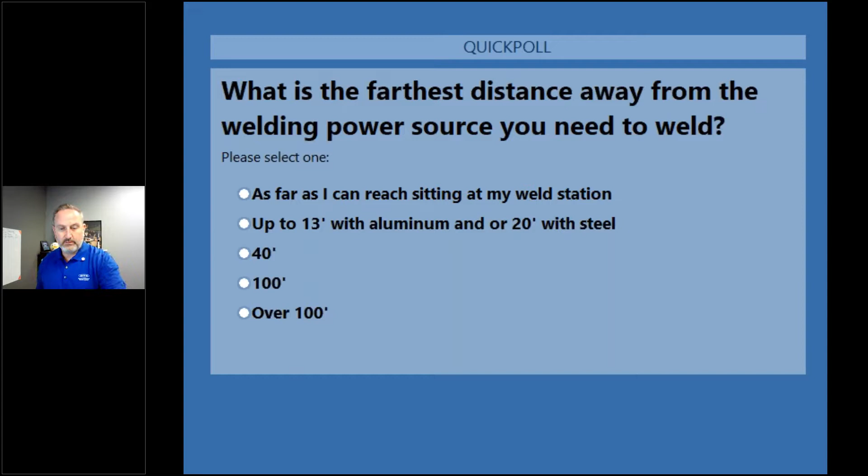And let's take a look at those poll results. And predominantly with 50%, people want to be able to weld 13 feet away from the power source with aluminum and 20 feet away with steel. And second place is a three-way tie. Some people want to really get out there over 100 feet. Some people want to go 40 feet, but some people just as far as they need to weld at their weld station. There'll be some items of value in today's webinar for those people that answered, I just need to be able to weld at my weld station, but this is predominantly for people that need to weld farther out.

So let's get into it and take a look at what we're going to try and cover today. So we're going to come back and review all these welding myths at the end of our presentation today. These are some of the leading opinions when it comes to large area fabrication gospel within the welding community. Hopefully you're already aware of some of these myths and are busting them in your normal day-to-day operations.

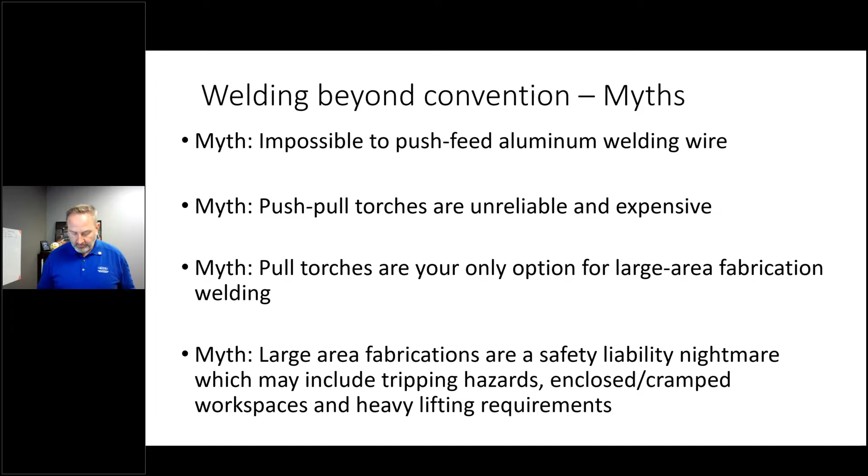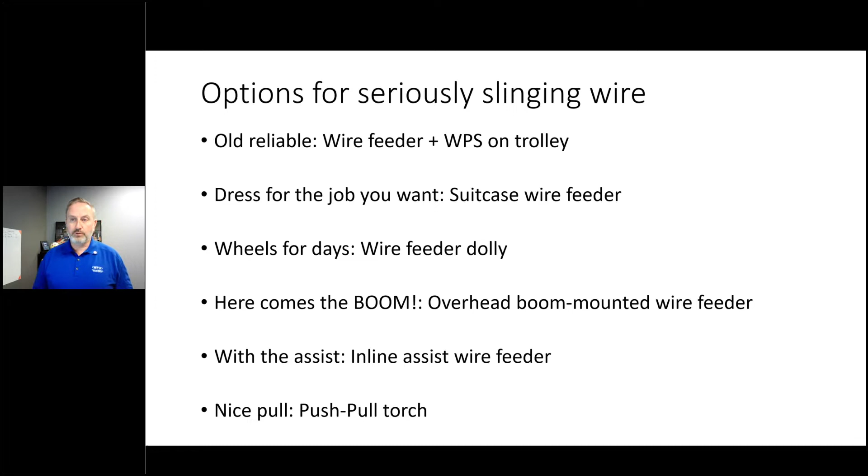So we'll start out and really dig into how to get wire out there and seriously sling it. From the basic stuff of just your wire feeder and weld power source, maybe just sitting on the floor, to getting it onto a trolley, maybe extending your range by taking your feeder out with you, doing some things to get the wire feeder up overhead, and all the way through to what we'll introduce today with what we've already got in the market and a push-pull torch, and the new reveal today is our inline assist wire feeder.

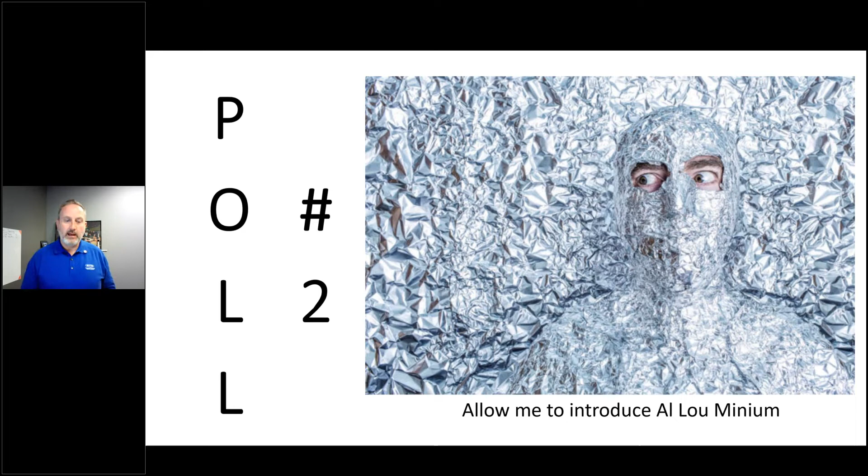Before we jump into all that though, we want to get to the equipment options and solutions that exist to help you break those welding gospel myths. And let's talk about public enemy number one. It's my buddy here, aluminum. Let's kick that conversation off with our second poll. What challenges do you face when welding aluminum parts?

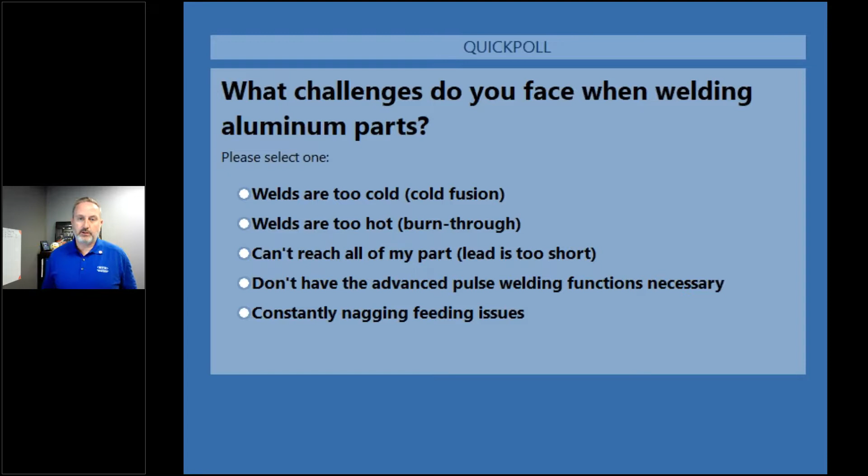And let's take a look at those results. Predominantly, welds get too hot with 54% here. And then another three-way tie for too cold, don't have the advanced pulse welding technology that you really need, or constantly nagging feed issues. And I think we're going to talk about a little bit of all of those.

But the reason I bring up aluminum, let's jump back into the presentation here, is that trying to feed aluminum wire is really like pushing rope, right? It's very difficult. So why not start with the hard stuff? And then if you can feed aluminum, yeah, you can probably feed everything else. Becomes just a whole lot easier.

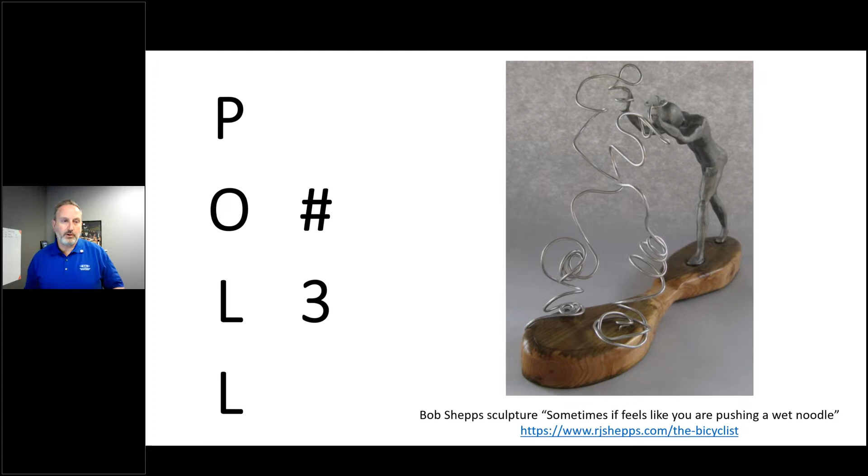So to talk a bit about your experience with feeding aluminum, let's see what your current situation is for those of you that are welding with aluminum in your current system by looking at poll number 3 here. How far from the source can you weld aluminum with your current system? Give everybody a second to respond to that.

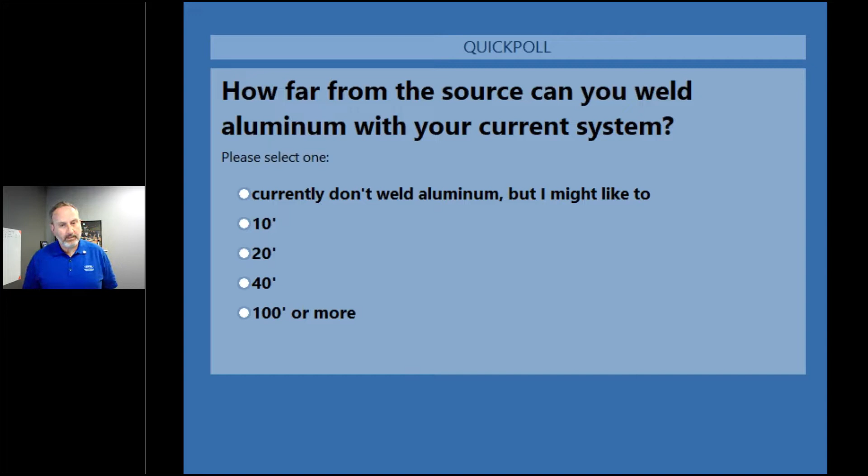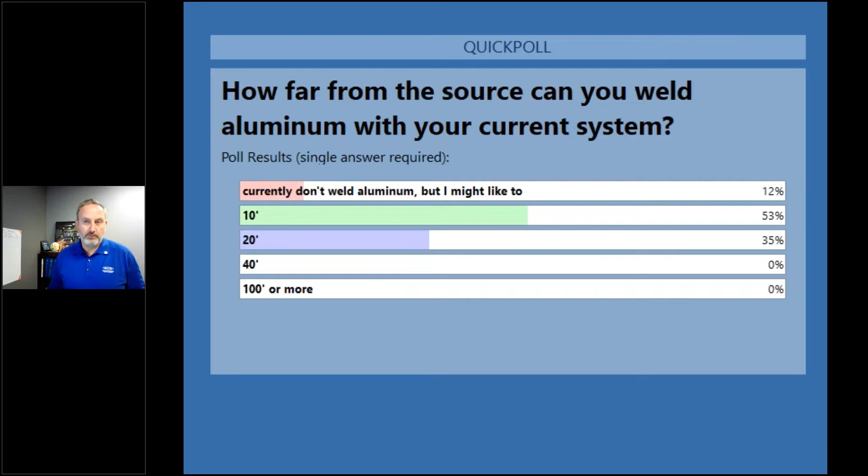And let's take a look at those results. So most people are able to get out to about 10 feet, which is pretty typical, right? Few folks on here can get out 20 feet. Few folks don't weld aluminum at all. Bear with me because I'm using aluminum as the example of getting feed reliability, but we're going to show you some solutions that can get you well beyond the conventional welding distances of 10 to 13 feet. And we'll talk about our products when we do that. I'm going to shut that off and we're going to dig into this.

Okay, so when feeding aluminum, welcome to school, right? Do a little bit of education here on feeding aluminum and really how to get aluminum pushed out 13 feet, how to combine with a push-pull system to get out to almost 40 feet, and then the ultimate, how to push-pull aluminum out 100 feet and beyond so you can push it an additional 13 feet.

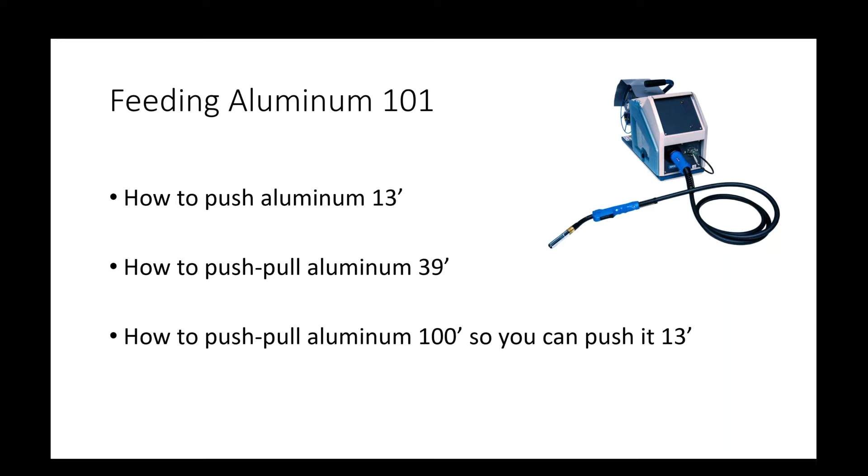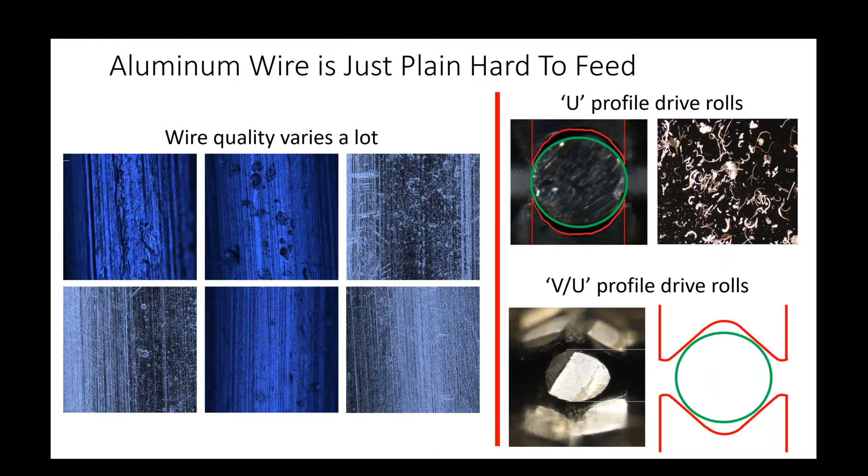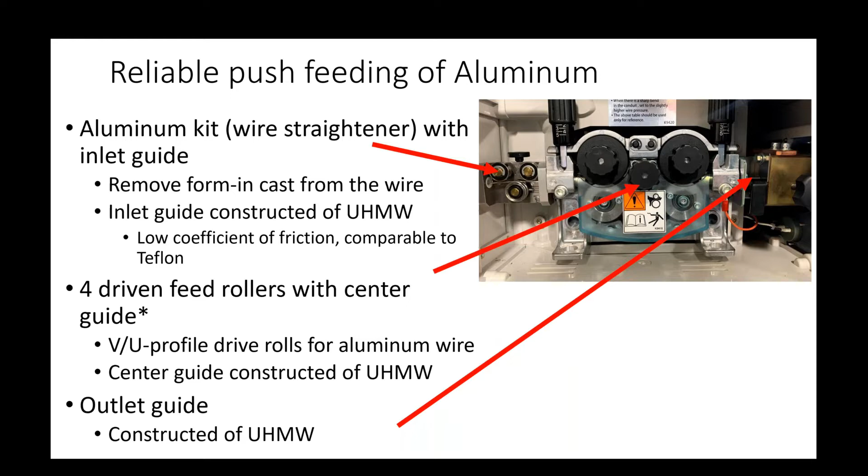Now, how to set feeding tension with an aluminum wire feed system. Here you can see the broader view: the wire feed, the inlet guide, the aluminum kit which is the wire straightener, the drive rolls including the center guide, and then the outlet guide over here to the Tweco torch, which you can see on the far right hand side.

When this video plays, you're not going to hear my voice, so let me talk a little about what Larry's doing here. He's set the tension of this wire such that when you restrict the wire out at the end of the torch, it slips. You want to have slippage. Slippage is good, that just means you're not going to bird nest inside the feeder. Let's take a look at that video of him setting up tension.

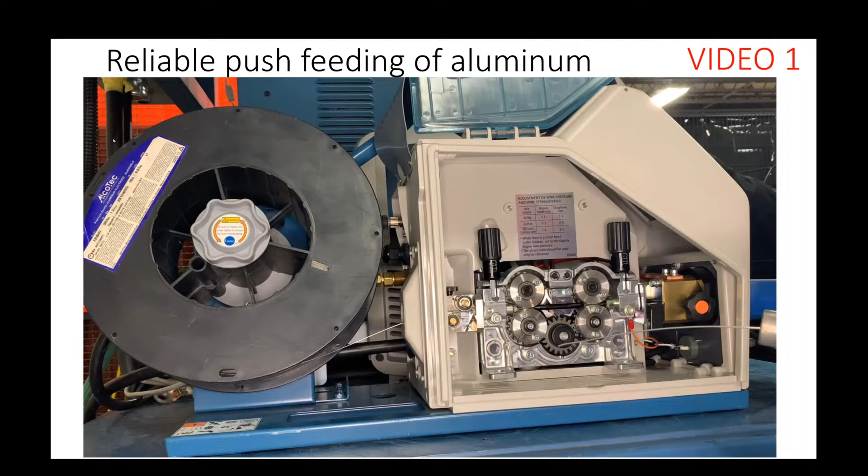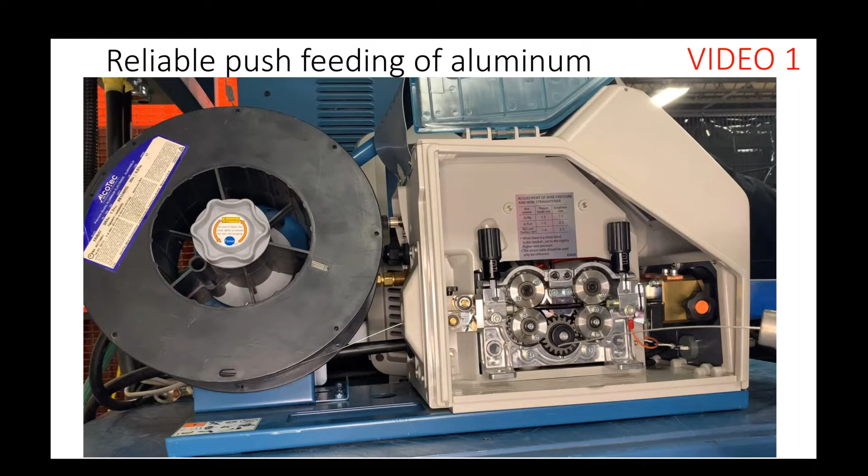All right, so you saw as Larry restricted the flow of the wire, it would slide through the mechanism. In other words, there was enough slippage there that you're not going to force in bird nest wire.

Now, this is an actual demo with customers here that are producing trailers. It's Extreme Trailer, one of our good customers. These are 13-foot torches, so we feel very confident in the ability to push aluminum wire out 13 feet. Let's take a look at these guys who use it on a daily basis and experience extreme reliability with the technology.

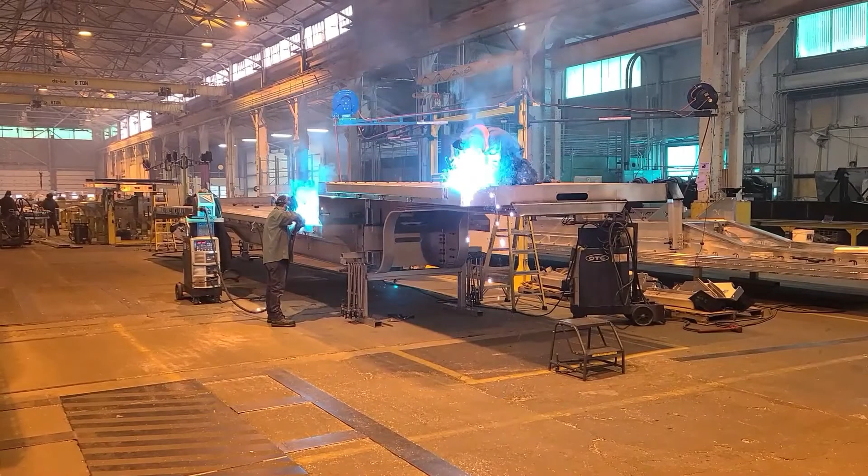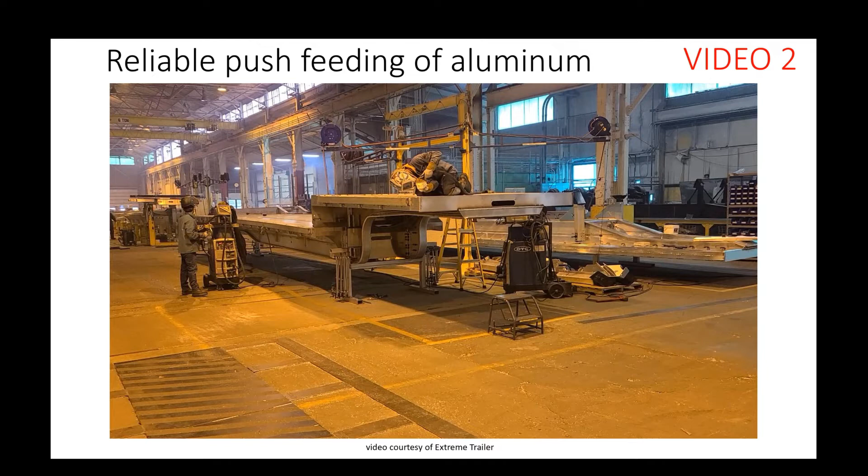13 feet is easily attainable with the DAIHEN reel feeding technology. But let's talk about some other ways to get farther out.

Another product we have is our XTEND-ARC family push-pull torch. This torch allows you to get 39 feet beyond the wire feeder. It comes in both an air-cooled and a water-cooled version.

It comes in pistol grip or standard grip, but it incorporates our IntelliTorch technology, which is the ability to remote control your weld process via the directional pad and built-in display in the handle of the torch. It's designed to be easy to use, even with your welding glove on, and it's very responsive. It also includes a built-in headlight, so if you're working in a restricted area without much light, this will help you see your work.

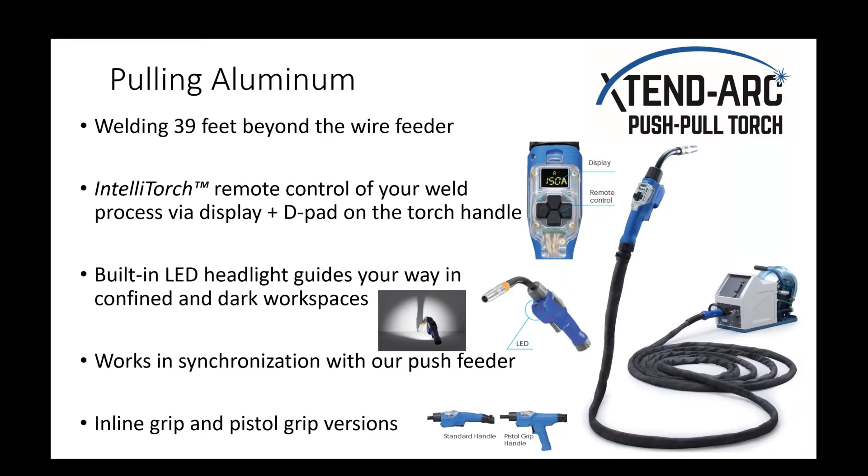This works in synchronization with our push feeder, so we need to be able to push aluminum out to it so that it can pull it the rest of the way.

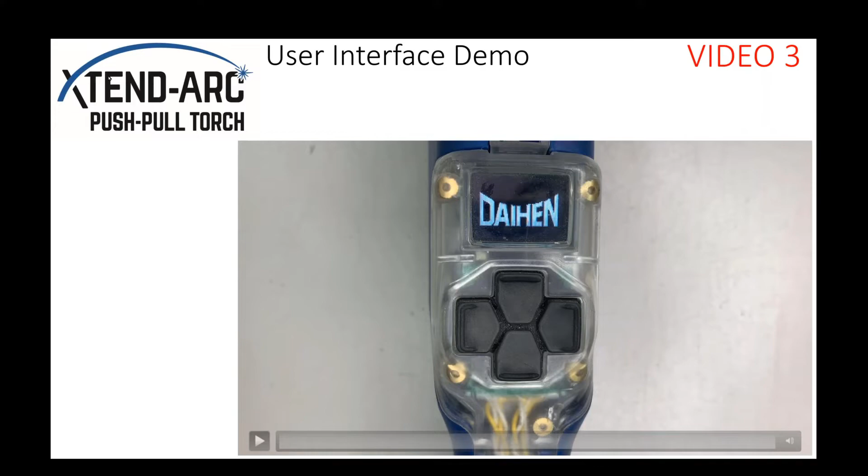Let's take a look at a demo walking through the user interface of this product. We're talking about the startup screen and programming screen of the DAIHEN push-pull torch. First comes up the DAIHEN logo along with the firmware version.

We have a D-pad below the screen that allows us to do navigation and settings on this. The primary settings come up. First is the welding current. This is the setting from the last power-off of the unit.

Using the right control, the next screen that comes up is the wire feed speed setting. Next to that is the welding voltage setting. And next to that is the synergic value of the arc length tuning. The last screen is the job or program number.

We go back to the welding current by using the up or down buttons. We can control the amperage from the handle. Next over would be the wire speed. We can go down or up in the wire speed.

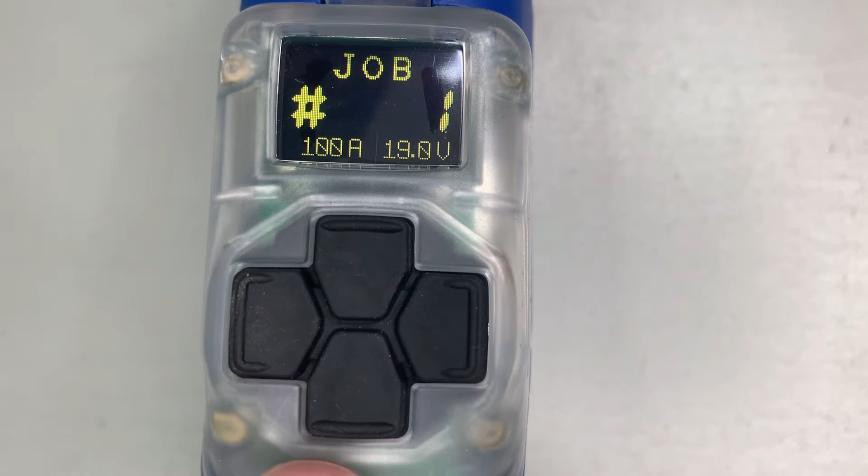Next one over would be the voltage. We can go up or down in the voltage. And lastly is the arc length tuning or synergic setting. Use the up and down buttons for that. Lastly is the job or program number. As we scroll through these numbers, we can see at the bottom of the screen where the amperage and voltage change, corresponding to the programs that we call out.

By holding the right-hand button down, we can load up another program. Getting into the secondary screen, we push and hold the left button until the screen changes. First option up is inching. We can switch to the right to inching and call out and look at the inching speed. This one is 250 inches a minute.

In the auto inching, we can push the right button again and it will feed the wire out. In this case, it's preset for 250 inches a minute. We can scroll up and down to change that speed. The job save allows us to go in and look at jobs that are there and change those programs to call up a new program or save the program that's there.

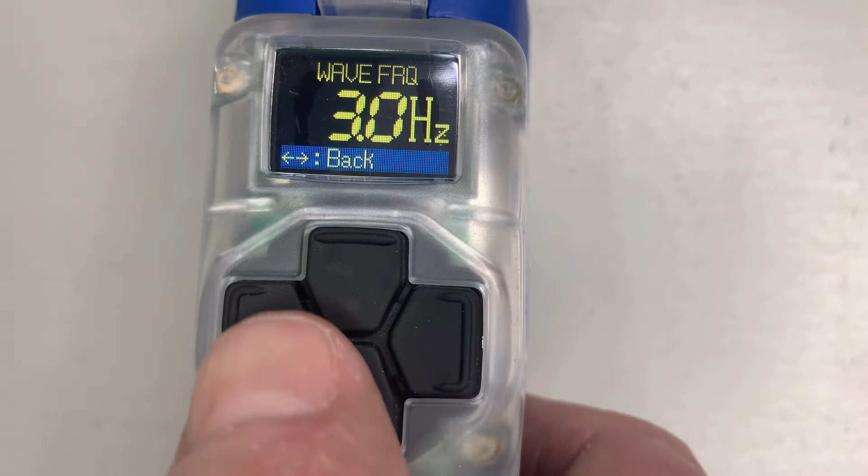The arc control allows us to make adjustments to the arc control, which is a fine-tuning of our arc. The wave frequency allows us to go in and adjust the frequency in our wave pulse programs, either in DC wave pulse or AC wave pulse. The EN ratio allows us to adjust the ratio between positive and negative on our AC MIG machines.

The version allows us to check the software version of this torch. The log allows us to check total welding time and max temperature. In this case, this is a brand new torch and we see no welding time, and we see that the ambient temperature here is 27 degrees.

The torch load is an indication of the power required to feed the wire. This is useful in examining the torch load differences and helps us know when to change liners and contact tips. The gas check allows us to feed gas or purge the gas from the torch handle without having to go back to the power source.

And then we're back to inching. To go back to the main screen, we push and hold the left button again, and we're back to the primary controls. Another nice feature with our push-pull torches is the headlight. It allows us to get into dark areas and be able to see where we're making the weld. The light comes on by pushing the left-hand button and holding it until the light comes on, and then we can turn it off the same way.

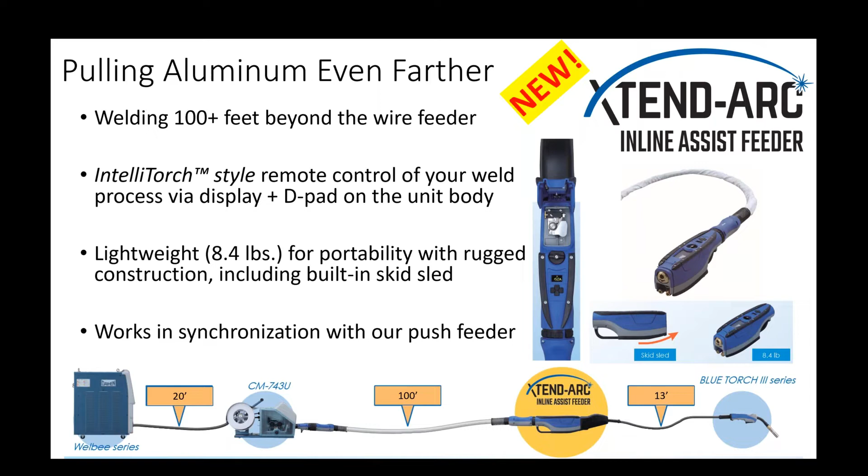Let's go through a demonstration now of the user interface and a better look at the unit from Larry, our welding engineer.

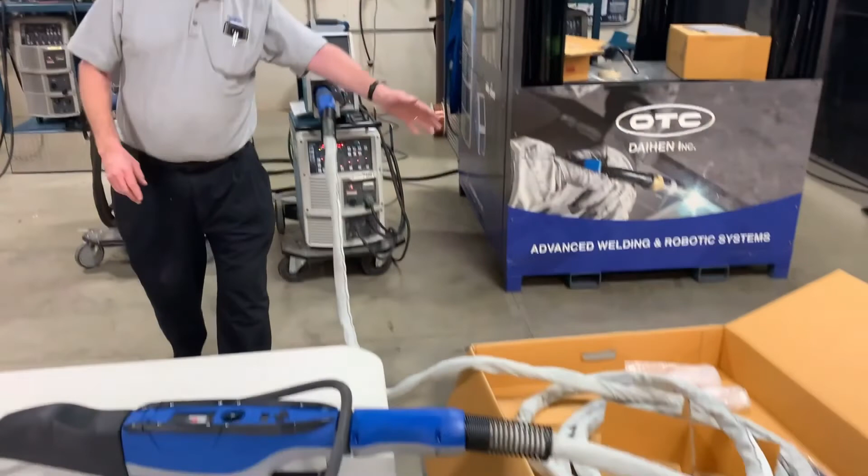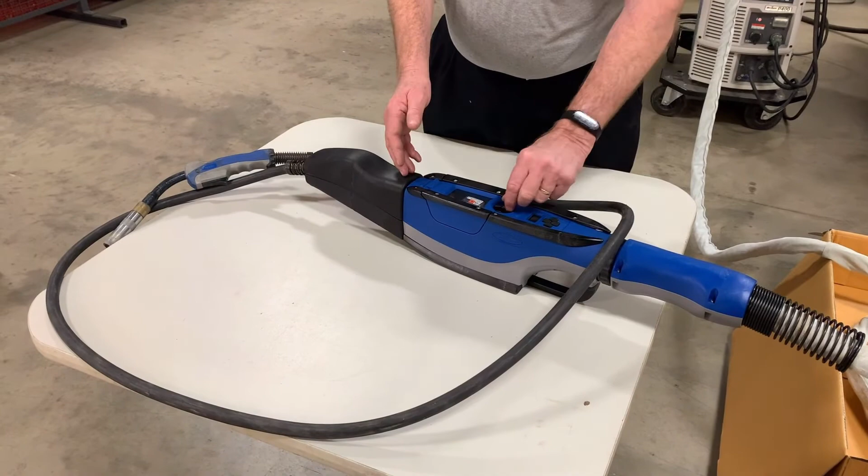We're showing our assist feeder here. It uses a standard Welbee power source, a standard wire feeder. We've got an adapter to the wire feeder to our umbilical. The umbilical cable can be 10, 20 meters or combinations of the two to extend out to the assist feeder. The assist feeder here allows us to take wire that's pushed out from the standard 4-roll feeder to here and support longer distances and more complex areas to get into.

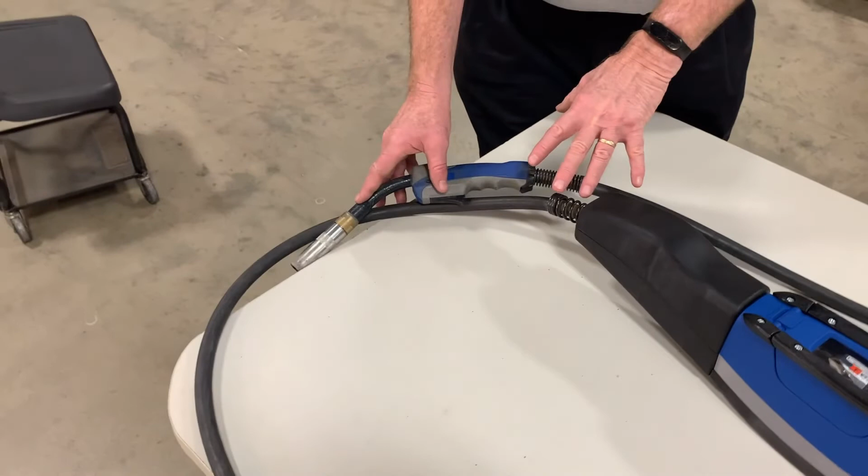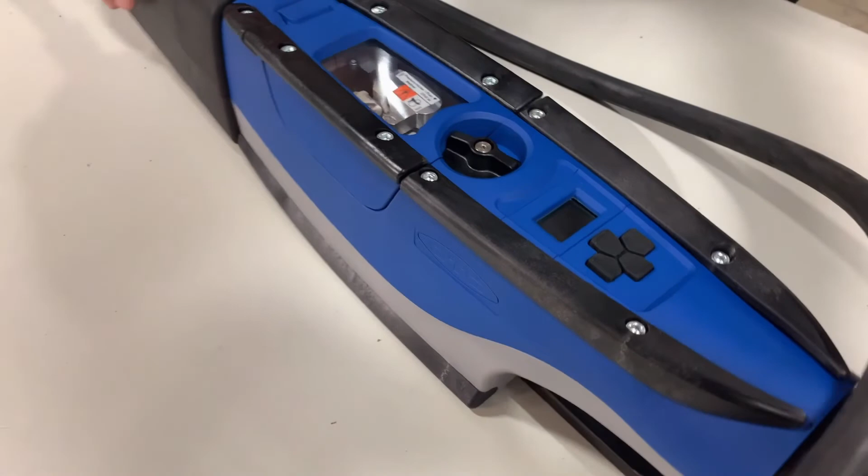The final component is a standard push type torch. No push-pull here, standard torch, standard consumables. The assist feeder has skids mounted on the top and the bottom, allowing us to move it around. It also has control features that allow us to make changes without having to go back out to where the power source is.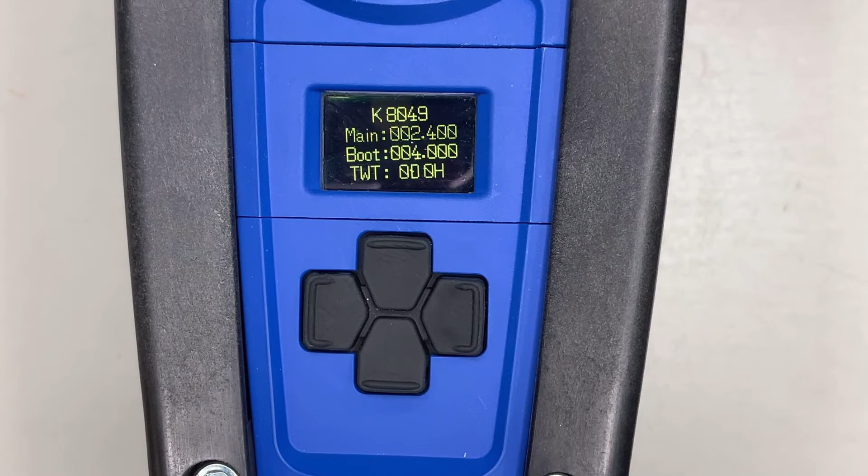This is a tour of the OTC XTEND-ARC Inline Assist Feeder user interface. On startup, the DAIHEN logo comes up, followed by the firmware version. The system is controlled with a D-pad, 4-way control, for the navigation and selection of program parameters. The welding current is initially called up from the last use or last program when the machine was shut down.

The next screen to the right is the wire feed speed. The next screen is the welding voltage. The next screen is the arc length tuning, which is the synergic value. And the last screen is the job or program number of saved programs in the welder.

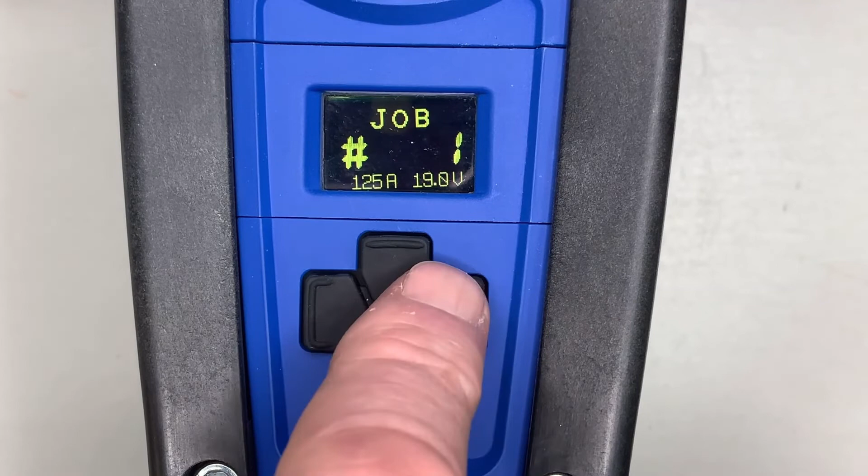We go back to the current, and using the up and down selectors on the 4-way, we can change the welding current from our remote location, either up or down. Switching over to the wire speed, we can do the same there. We can raise or lower the wire speed of our program.

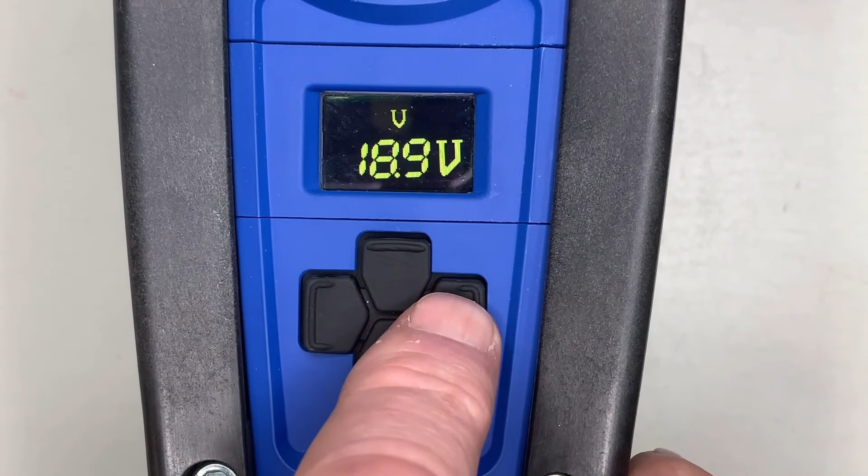We can also go to the voltage, lowering or raising the voltage to tune in our arc. Next is the arc tune selection of the value, the synergic value. We can raise and lower that value.

We decide we want to go back to and select a job, the saved jobs. We can select any of the preset values. You hold the right button and it shows that value loading, and we're back to, in this case, program 3.

From the prime menu, we can hold the left-hand button down and get into the sub-menu for secondary settings on the assist feeder. The first option that comes up is inching. If we right-click over, it shows the inching speed, which we can adjust with up and down changes. Then as we hold the right-hand button, we can actually inch the wire.

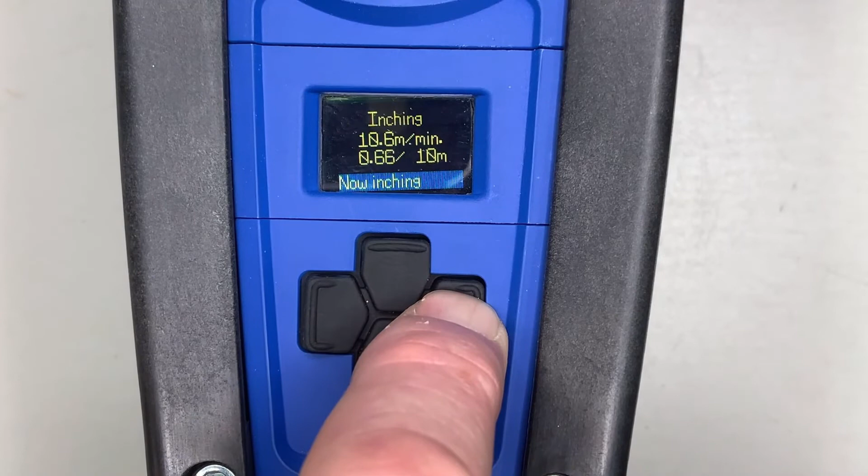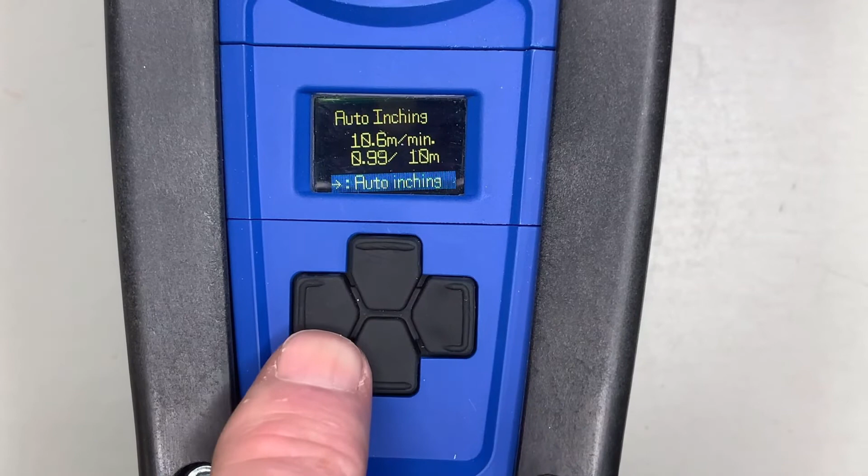Going back, the auto inching function, if we hold that, allows us to feed wire all the way from the primary feeder out to the assist feeder into the torch. This allows us to start this without having to continually hold the button until the wire is fed the entire distance.

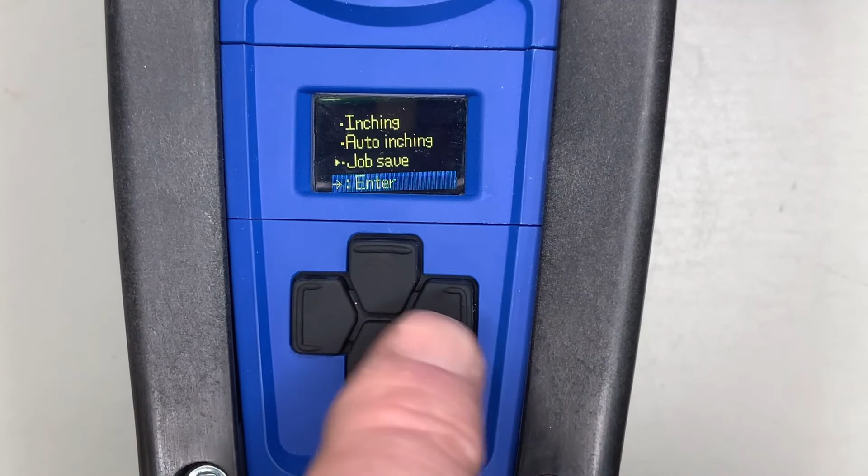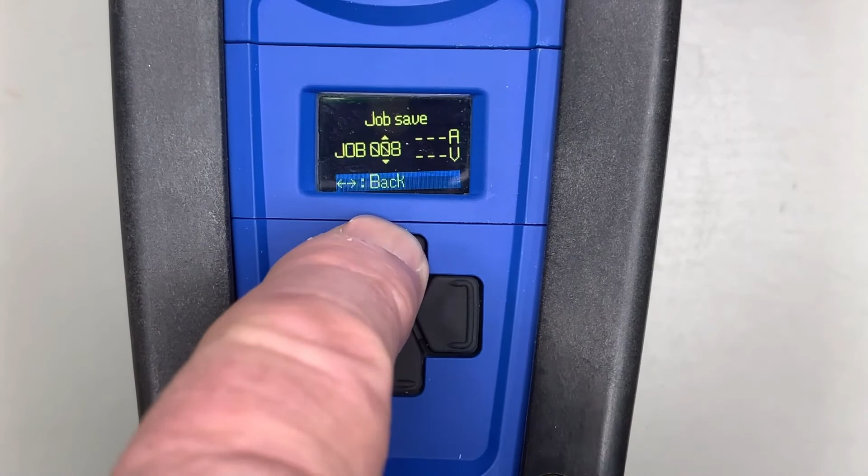The job save allows me to go in and modify a program, or look for a program that is not saved and save my existing program or my changes to a new program by holding the right button until the save screen shows.

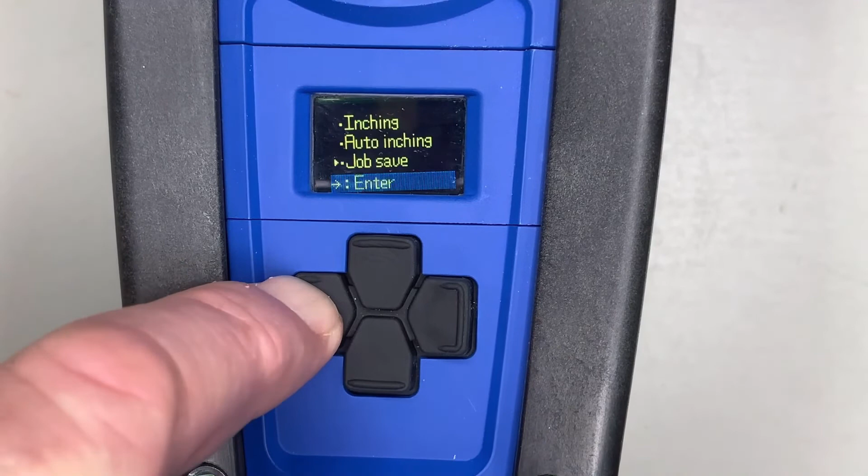Next one is arc control. Allows me to fine-tune the arc from the assist feeder.

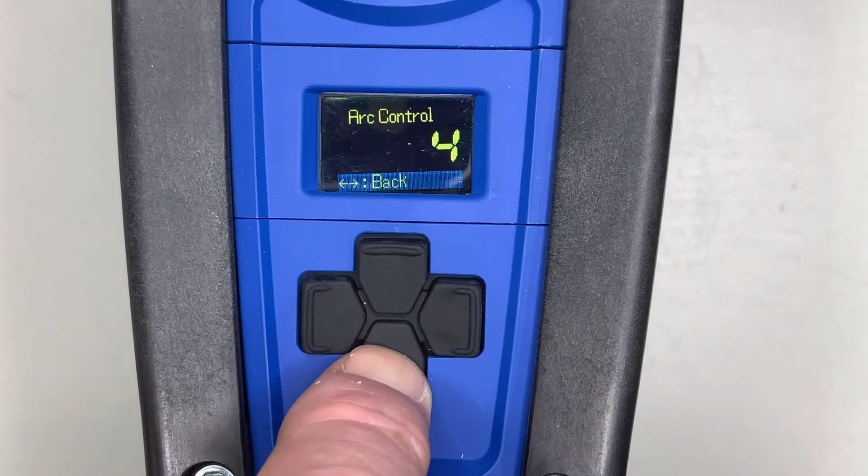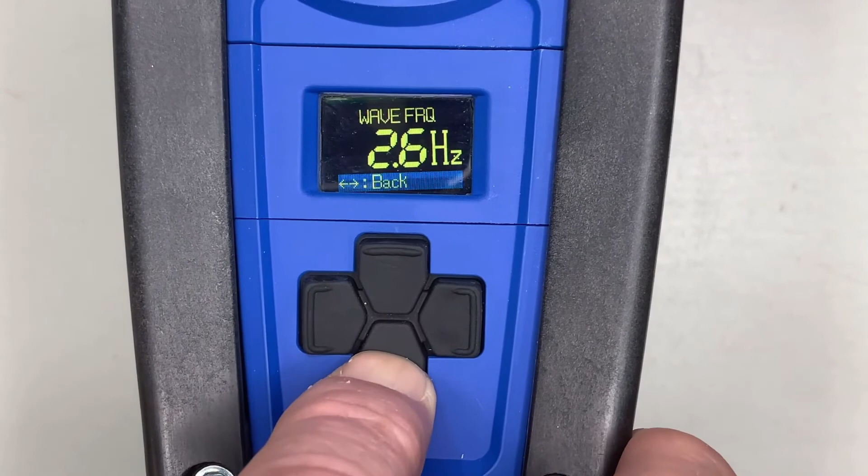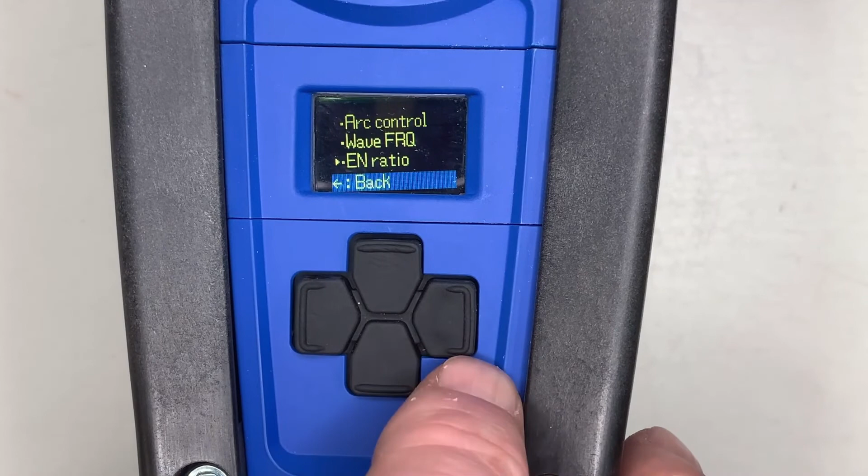Wave frequency. If we are in a pulsed program, a wave pulse program, we can adjust the wave frequency, the hertz, from the control here. If we are using the W400, which is an AC MIG machine, we can adjust the EN ratio from this point here. In this case, we don't have a W400 hooked up, so the program will not accept the changes.

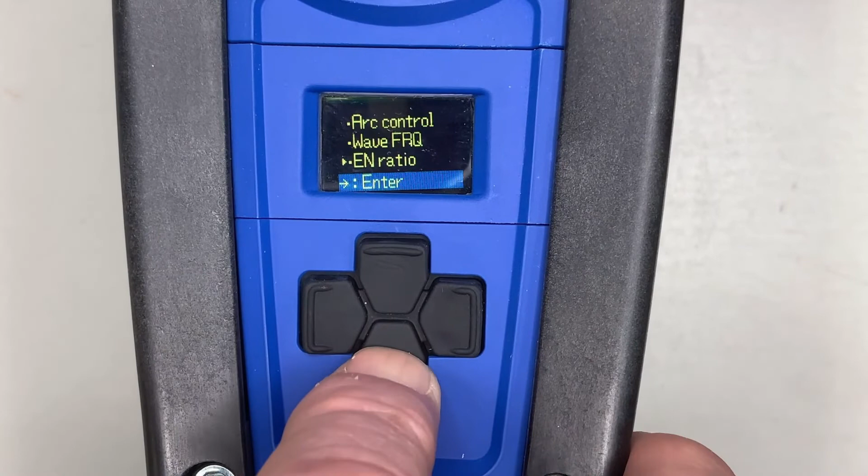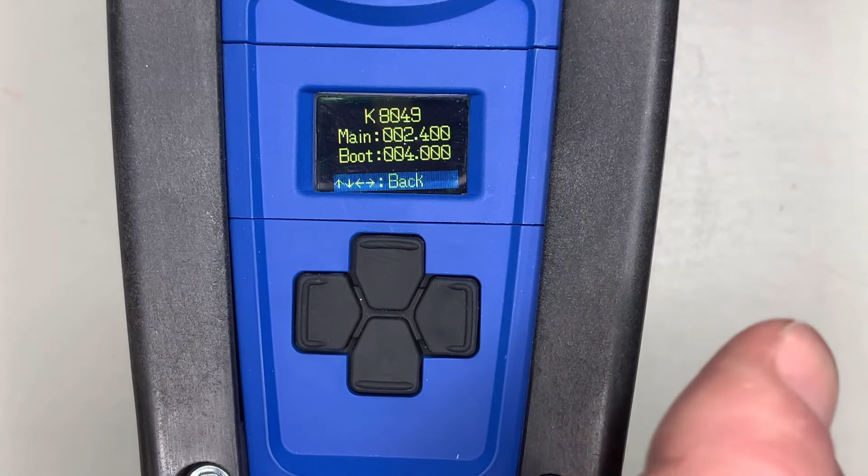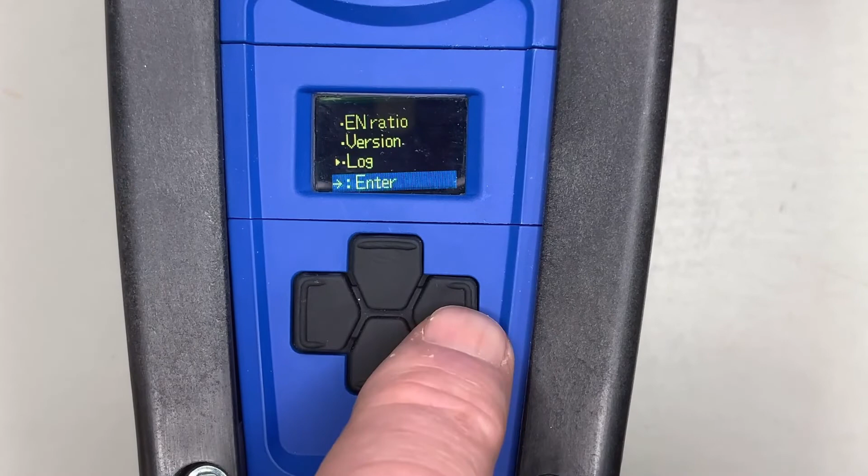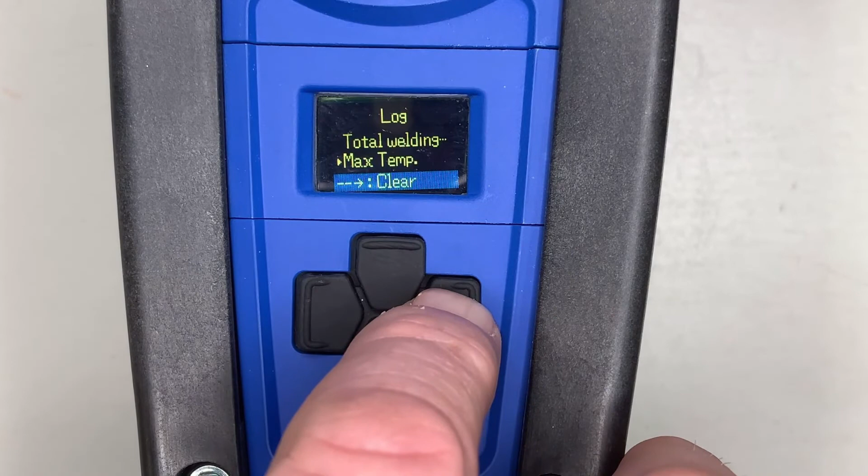The version, very helpful when calling in for service and looking for help. It helps us understand what version of software and firmware is in this unit to help us understand and make any suggestions and changes. The log screen tracks two things. First is total welding time, and second is max temperature. And then there is a clear screen that you can hit on the right that will clear that and will get you back to reset values.

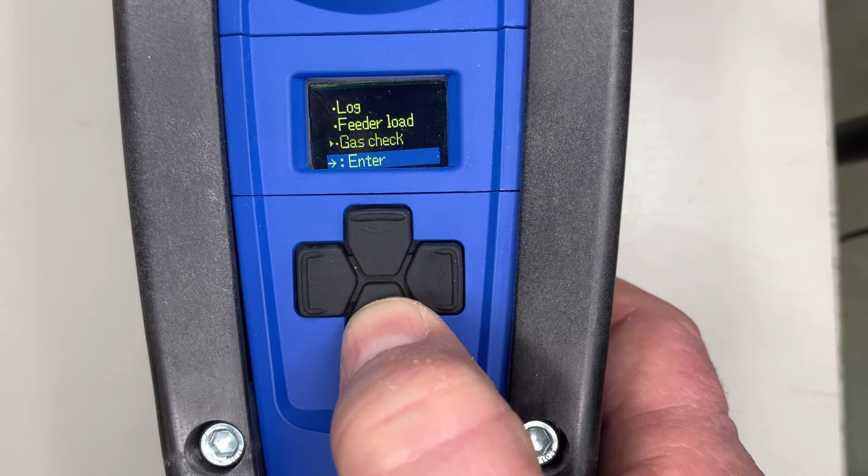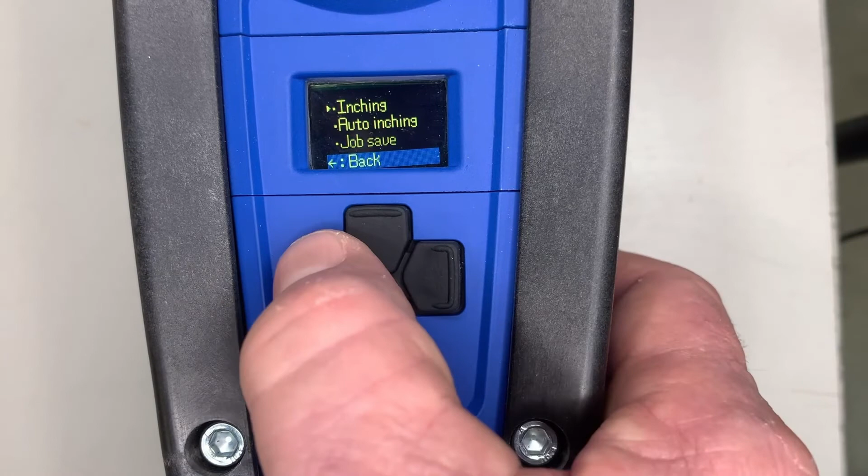The feeder load, which shows the amperage draw on the feeders and helps us to change out the liners when needed. Gas check settings, which allows us to purge gas from this screen. Cable length, which is initial setup. The model of the assist feeder. And back to the inching screen. Holding the left-hand button again takes us back to our primary setting screens. Another feature on the left-hand button is it gets you back.

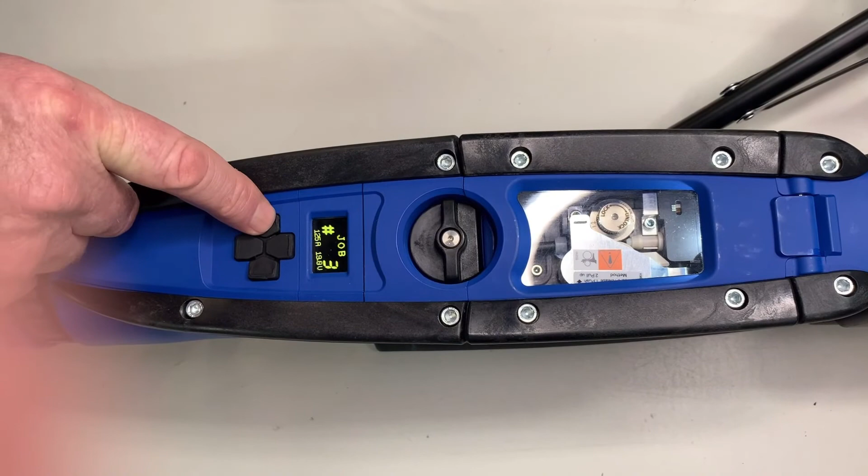It allows us to turn a light on if we're down in a dark area like the bowels of a ship. We can see what's going on with our feeder. We're able to get in there and see what's going on and make adjustments and check our feedability and our feeding system. Push that again and it shuts off.

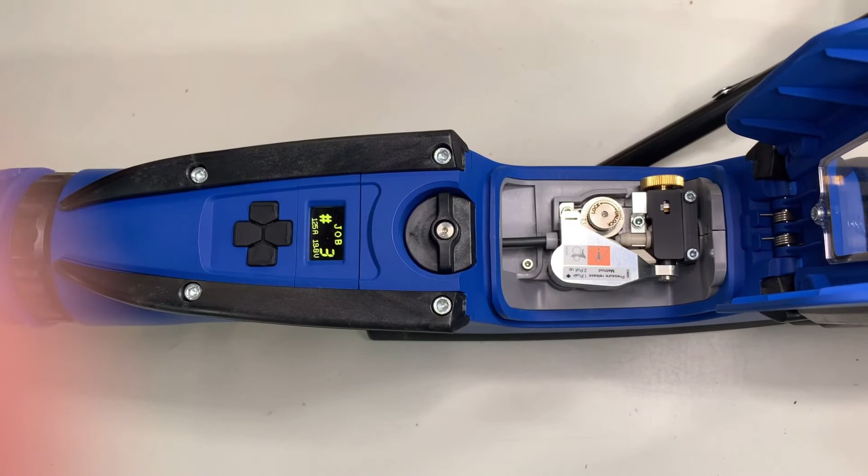A couple of things in that video I wanted to point out. I think you saw on the push-pull torch that the settings were in English units. And then with the inline assist feeder, don't know if you recognize it or not, but they were in metric units. So you can switch back and forth if your operation is set on one or the other. Of course, in the US here, mostly English units.

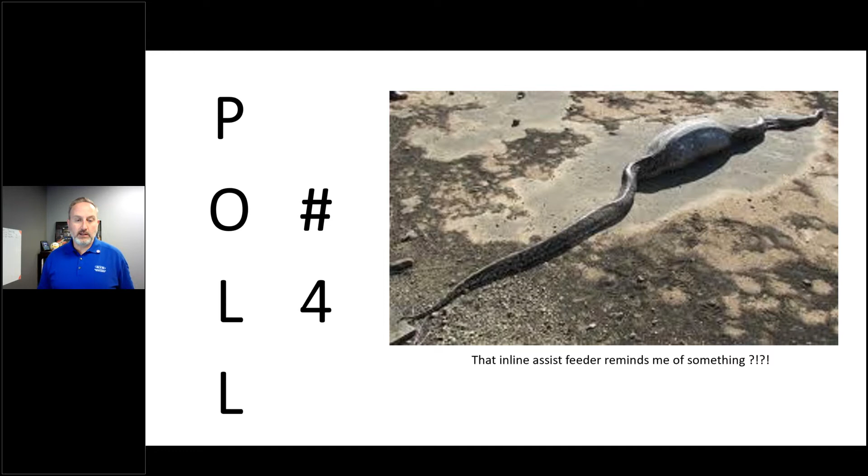So with that, let's get into our fourth poll. So what features of the new inline assist feeder caught your interest? Give everybody a chance to respond. Let's take a look at those results.

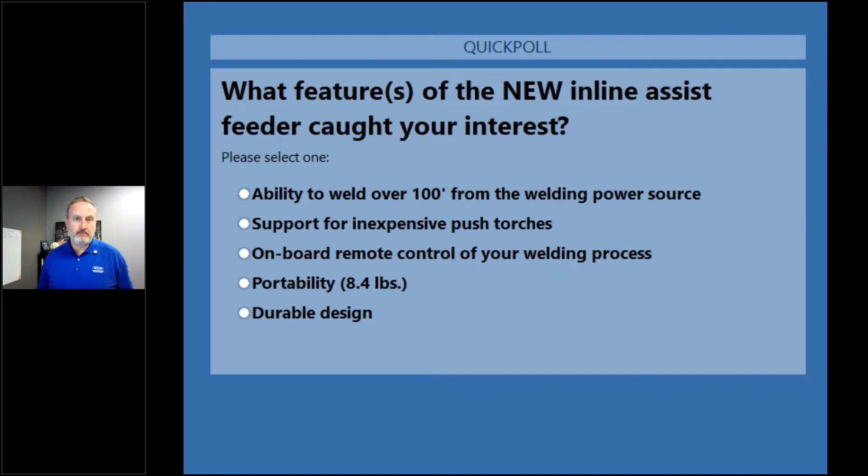So yeah, it is the best feature of this thing, and that is the ability to get very far away from your welding power source. This thing is extremely portable, very easy to use. I also like the fact that it uses conventional push torches. That's a very cost-effective solution when you think about replacing a push-pull torch and the cost of that compared to a conventional push torch, very inexpensive to replace.

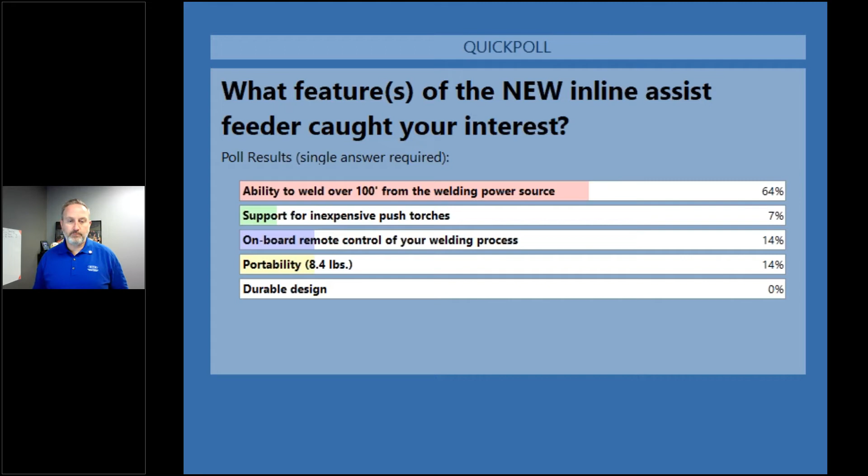A few other things here, people like the ability to control it locally. I think you have to have that, right? You're not going to walk 120, 130 feet back to the welding power source to make changes. You need to be able to do that on board the unit, and it is extremely durable. So it's a very good product. Excited about what it opens up for you guys. Let's move forward here.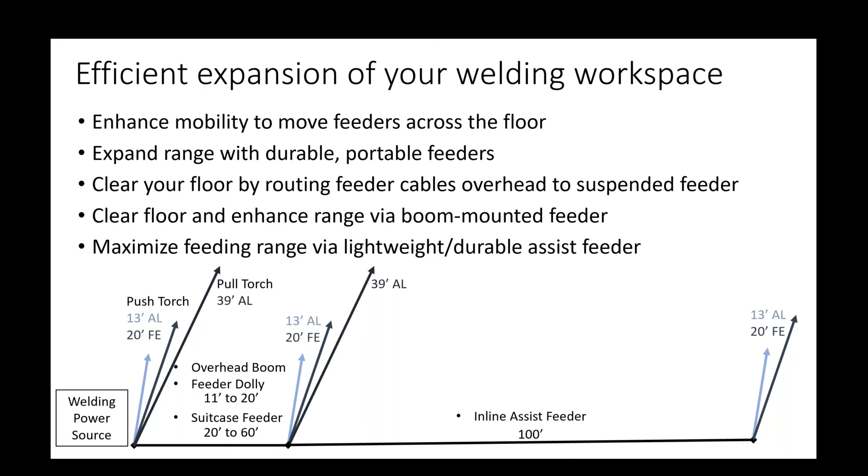And then that inline assist feeder, look at how far beyond even our other options here of a boom mounted feeder or suitcase feeder. Look at how far that gets you beyond that normal welding range. It's a game changer. We showed a video of one of our good customers, but this is something that you can really do on your own. And so how about a few things that are DIY, right?

So this is our welding trolley, but think about the mobility that a trolley delivers when you need to weld beyond your torch lead length. For a relatively small investment, and our fancy one that you see on the left is $625. The more basic one that our customer Extreme Trailer is using there is a little under $600. Or even just putting casters on the bottom of the power source in our set is about $175. You get mobility, and if you've got mobility, you can do quite a bit more with your welding operation.

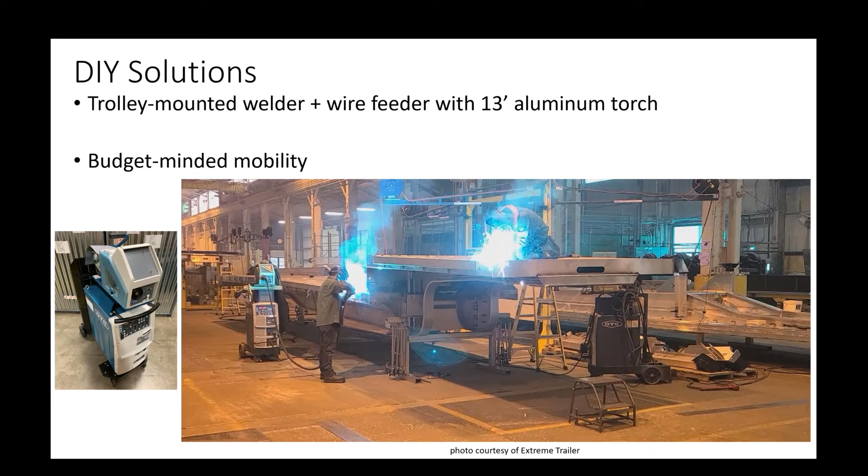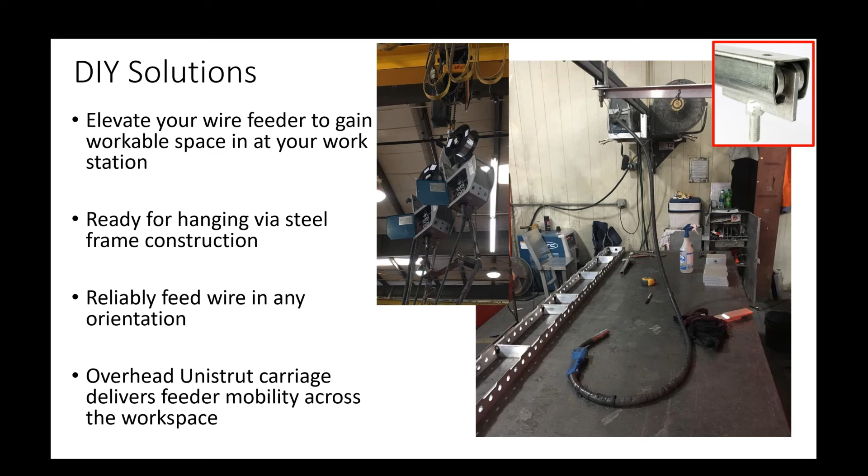Another thing that you can do yourself, hanging your wire feeder overhead to gain workable space. So hang it on an inexpensive winch, which you can raise and lower to access when you need to either put new wire in there or make adjustments. Or how about the customer here on the far right-hand side, who combined a unistrut rail with a sliding carriage, delivering much more mobility to their wire feeder. Again, these are ways you can clear your workspace and take advantage of expanded range of motion of your wire feeder.

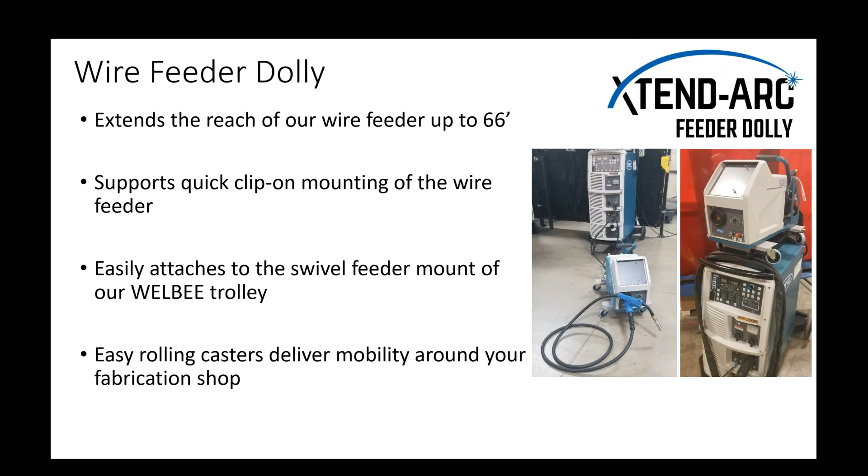In our XTEND-ARC family, we have another option, which is a wire feeder dolly. So this extends the reach of our wire feeder up to 66 feet. It supports clip-on, so it easily attaches and allows it to be pulled around on the floor via its 4 caster wheels. I mean, this could probably be done by yourself as well. We only charge a little over $200 for ours, and it comes with some added benefit of being able to combine it with our other products. You can see our dolly mounted onto the trolley, so it goes onto the swivel feeder mount and just allows you to use it either on or off the weld power source trolley.

Some more of our XTEND-ARC product, we have suitcase wire feeders. These are very portable and very durable. We don't make the case, so it's a commercially produced and commercially grade enclosure with the clamshell lid for easy access to the mechanism and the wire reels. Our 8-inch version is a little over $2,500, and our 12-inch version is a little over $2,600. And this eliminates the need for the conventional wire feeder. It replaces it with this unit. You will need to add extension cables from your welder to this feeder to make it work, but it's a pretty reasonable alternative. And let's look into the justification case for this.

Back to that trailer customer who, by adding the suitcase feeder, was actually able to gain 15% more arc-on time. That's an additional 1.2 hours of every welding production workday. Through that additional production, they are able to gain $190 a day in sales profit. You're going to make more money from the product that you're delivering out the door. So their suitcase feeder upgrade, in this case the 12-inch version, paid for itself in 3 work weeks. That's a tremendous justification.

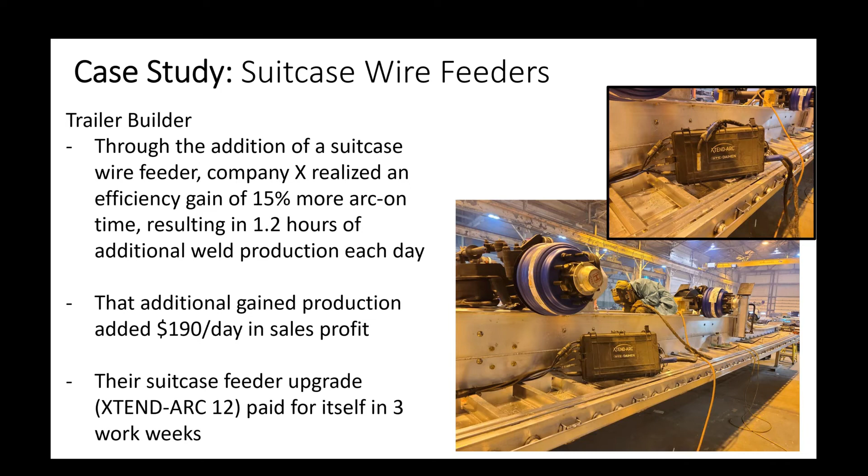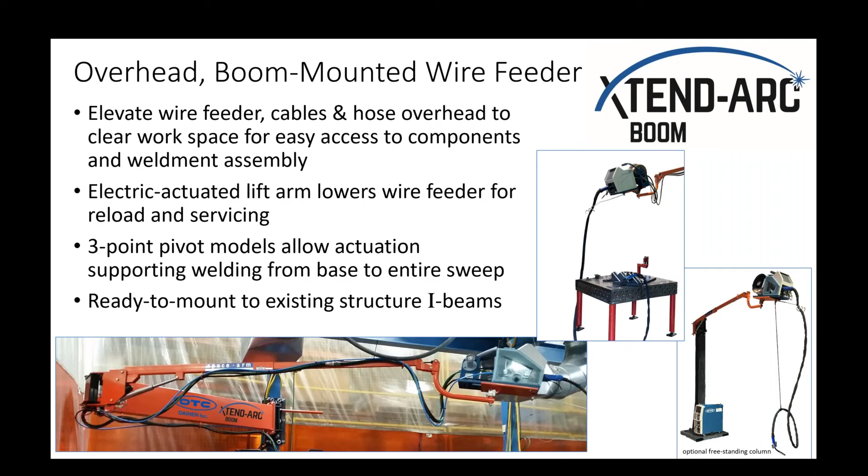We also have overhead booms in the XTEND-ARC family. These are an overhead boom mounted wire feeder to get the cable, hoses, and feeder up off the floor. We have an electric actuated lift arm, so you can lower the wire feeder to add a wire reel or change the wire reel, and to also service or set up the feeder. We have both single arm and dual arm. The dual arm gives you the advantage of 3 points of articulation, allowing it to sweep completely through your work area. Now we have 3 models of those.

The SPED 306, which is only the lifting arm piece, gives you 10 feet of sweep at an 8-foot installation height, and that goes for $1,600. The 606 expands that by adding the swivel arm to the lifting arm, giving you 20 feet of sweep at that same 8 feet of installation height, and that goes for a little over $2,000. And then the larger one, which increases that installation height up to 10.5 feet, is still giving you the 20 feet of sweep, is $2,400. So these are very cost-effective solutions. And I encourage you to take a look at the literature for this product, which is attached in the handouts of this presentation.

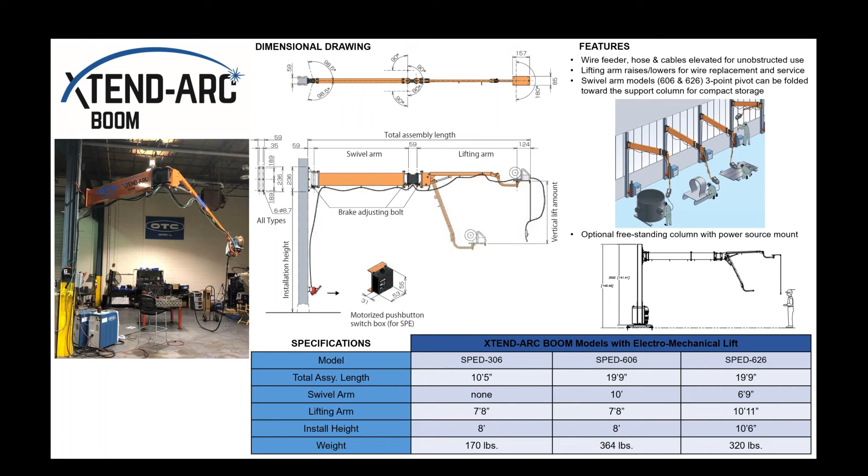Now the two we've already talked about today are the XTEND-ARC push-pull torch and our brand new XTEND-ARC Inline Assist Feeder. Very cost-effective solutions. Talk about push-pull: to upgrade your WELBEE to a 39-foot air-cooled push-pull torch is $2,760. To upgrade that to a 39-foot water-cooled version of it is $4,125. For each of those, you do need to upgrade the wire feeder, and that is a one-time fee per wire feeder of

$1,250. And I'll go through in the next slide a case study showing how that can easily be justified in a short amount of time. The brand new Inline Assist Feeder allows you to upgrade your current WELBEE to a 20-meter length for $9,375, or to upgrade to the full 30-meter length for $10,484. Also very easy to justify considering you're expanding your work range ×3.

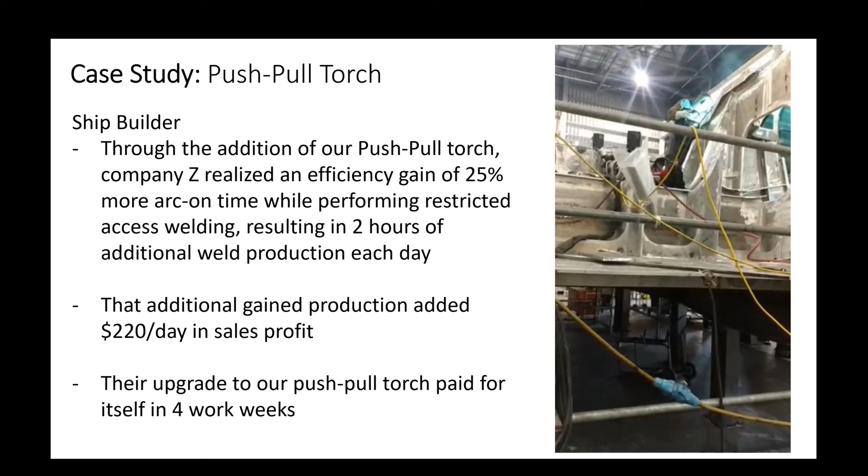And now we're toward the end here, and we had talked about the myths that exist within the work envelope of large area fabrication. Let's go through each of these myths. Obviously, we've shown that it's very reliably able to push feed soft aluminum wire 13 feet beyond the wire feeder. We do that every day, and we've been doing that for probably the last 10 years with our most recent technology. Push-pull torches are unreliable and expensive. Well, we proved to you in a use case that our XTEND-ARC push-pull torch series delivers high reliability at a very reasonable price and pays for itself in short order. We saw that they pay for themselves within the first month of use.

Pull torches are your only option for large area fabrication. We showed you many different versions to get from benchtop welding, reaching all the way out to the new inline assist feeder, 120 feet away from your welding power source. So the final one here: large area fabrications are a safety liability nightmare of tripping hazards and heavy lifting requirements. They certainly are, but by implementing some of our technology, most notably the booms, and getting things up off your floor, you're going to reduce the risk of your employees getting hurt when they're navigating that environment.